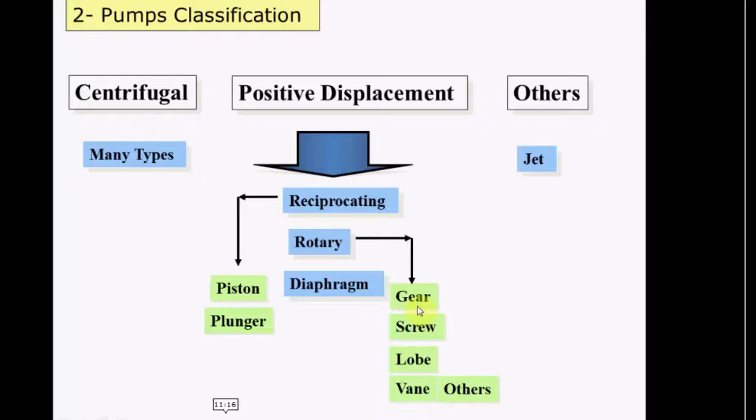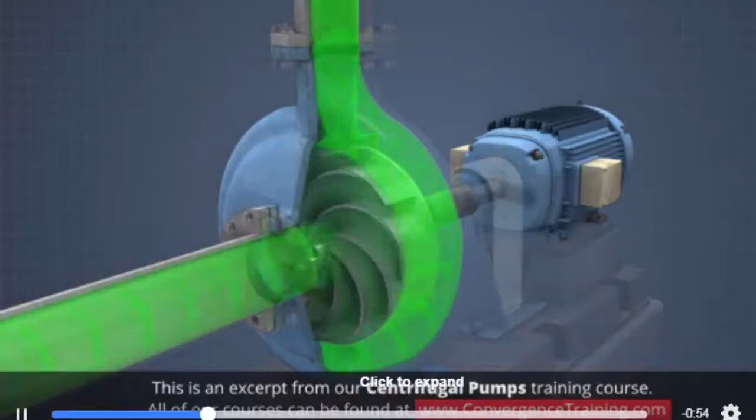A centrifugal pump consists of a rotating impeller mounted on a shaft inside a stationary casing. An electric motor, or some other driver, is used to rotate the impeller at a high speed. As the impeller rotates, centrifugal force pushes liquid outward from the center, or eye, of the impeller.

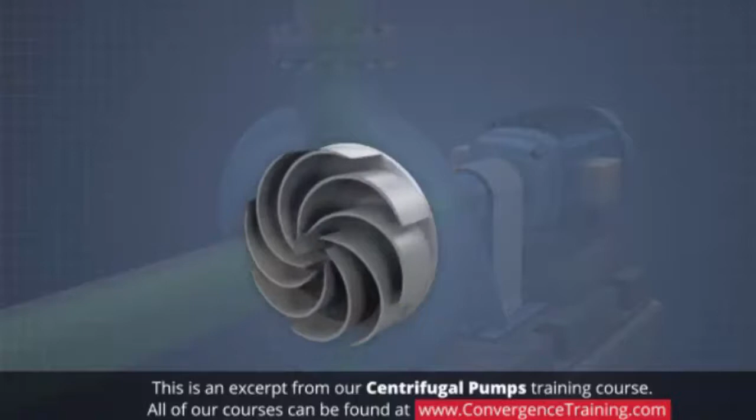This increases the liquid velocity and creates a low pressure zone at the eye of the impeller, which allows more liquid to flow into the pump through the suction inlet. Vanes on the impeller help direct the liquid to the outer edge of the impeller and into a gradually expanding channel called the volute, which collects the liquid and directs it to the discharge port.

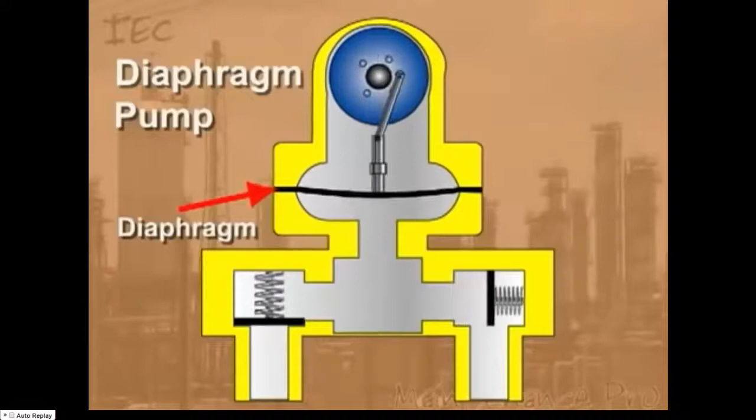There are 4 types of rotary pumps: screw pump, gear pump, lobe pump, and vane pump.

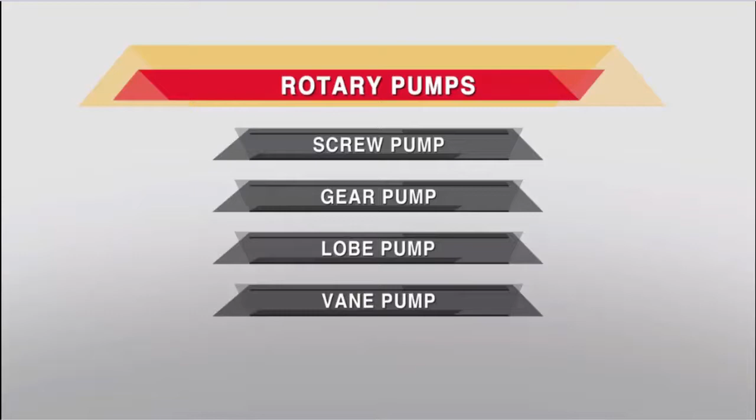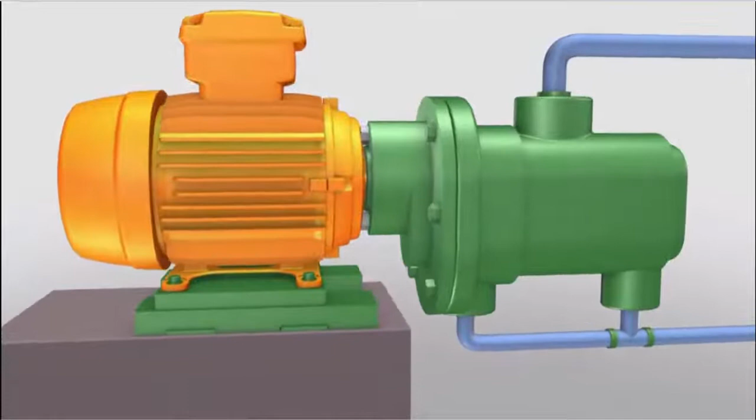In screw pumps, it is the intermeshing of the threads on the rotors and the close fit of the surrounding housing that creates one or more sets of moving seals in a series between the pump inlet and outlet. These sets of seals, or locks as they are sometimes referred to, act as a labyrinth and provide the screw pump with its positive pressure capability.

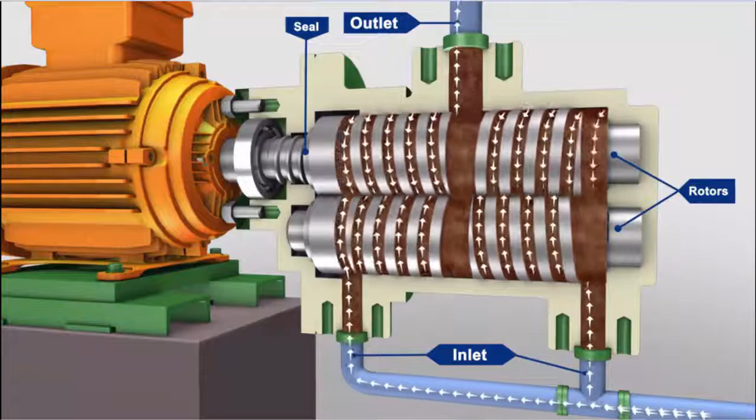The successive sets of seals form fully enclosed cavities that move continuously from inlet to outlet. These cavities trap liquid at the inlet and carry it along to the outlet, providing a smooth flow.

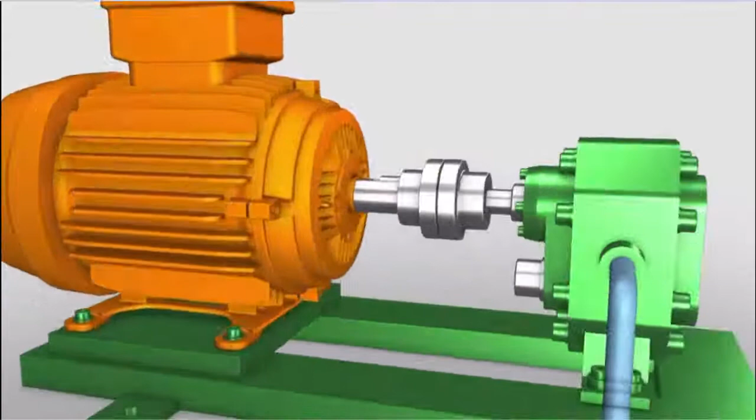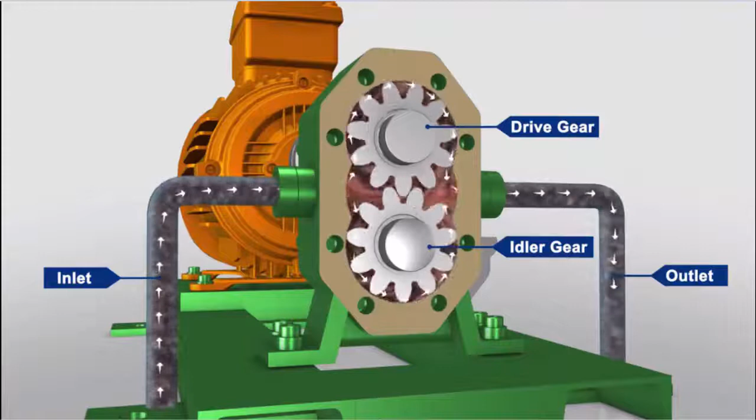The gear pump is so named because it has 2 gears that are side by side, or external to each other. A drive gear that is driven by a motor rotates an idler gear in the opposite direction. When the gears rotate, the liquid, which is trapped in the gear teeth spaces between the housing bore and the outside of the gears, is transferred from the inlet side of the pump to the outlet side of the pump.

The meshing of the gears on the discharge side of the pump forces the liquid out of the pump and into the discharge piping.

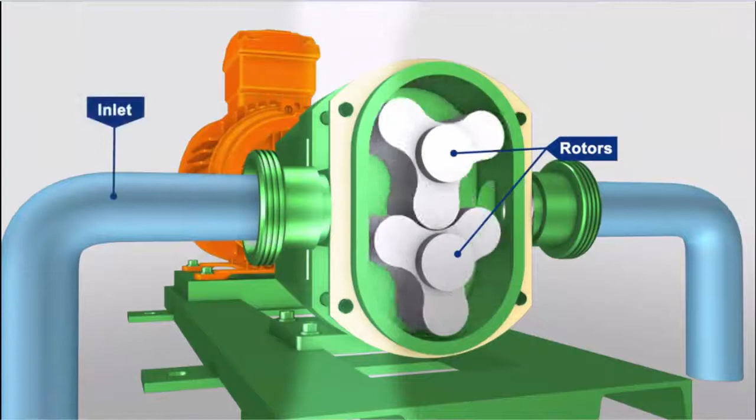The lobe pump receives its name from the rounded shape of the rotor radial surfaces that permits the rotors to be continuously in contact with each other as they rotate. Lobe pumps can be either single or multiple lobe pumps and carry fluid between their rotor lobes much in the same way as a gear pump does.

Unlike gear pumps, however, neither the number of lobes nor their shape permits one rotor to drive the other, and so all true lobe pumps require timing gears.

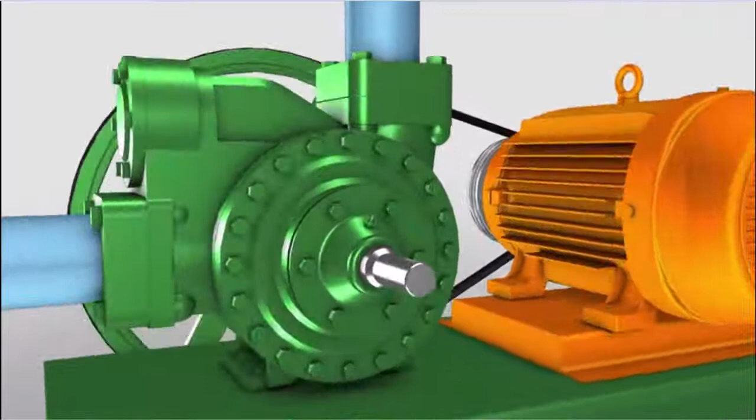The vane pump includes a rotating cylinder containing equally spaced radial pistons arranged radially around the cylinder center line. A spring pushes the pistons against the inner surface of an encircling stationary ring mounted eccentric to the cylinder.

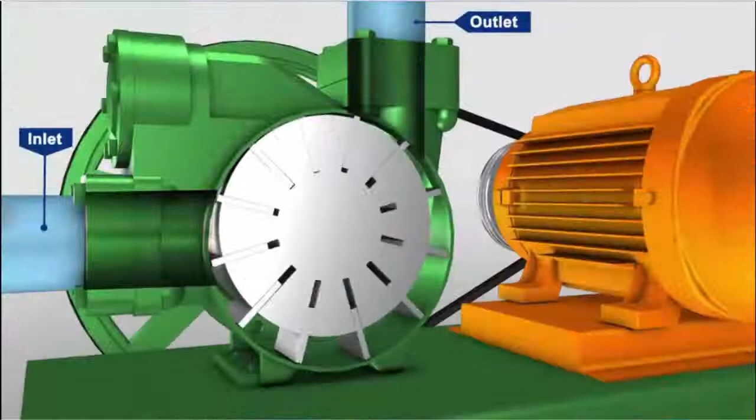The pistons draw in fluid during half a revolution and drive fluid out during the other half. The greater the ring eccentricity is, the longer the piston stroke and the more fluid they transfer.

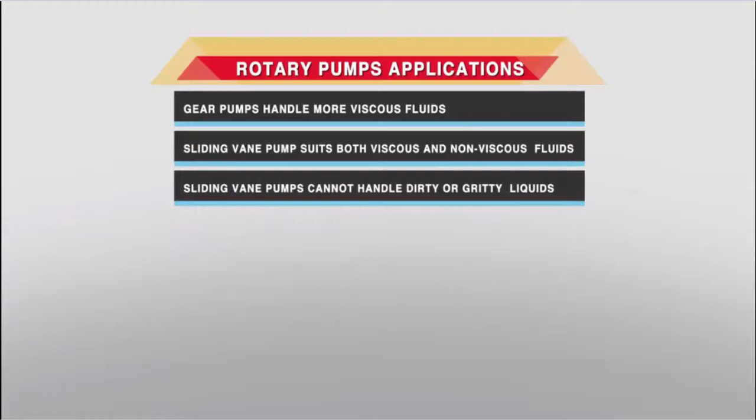Applications of rotary pumps: gear pumps handle more viscous fluids. The sliding vane pump suits both viscous and non-viscous fluids, but sliding vane pumps cannot handle dirty or gritty liquids. Vane pumps are ideally suited for low viscosity, non-lubricating liquids.

Sliding vane pumps are used for vacuum services. Lobe pumps are used for food and beverage processing, and lobe pumps can handle both low and high viscosity fluids.